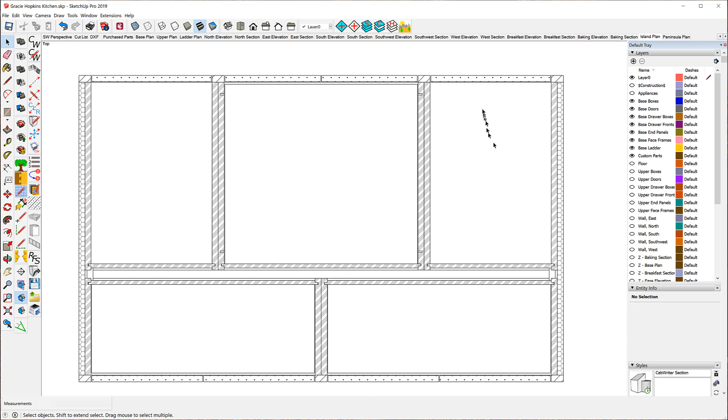I also added the island plan. This is the plan view for the island. And we added the peninsula plan view back in Part 10.

The other thing I did was I renamed this model from CabWriter Comprehensive 3 Part whatever to Gracie Hopkins Kitchen, because this is the final drawing. And since I did that, I also changed the project name to Gracie Hopkins Kitchen. The interesting thing about that is that name will be used in layout, and I'll show you later.

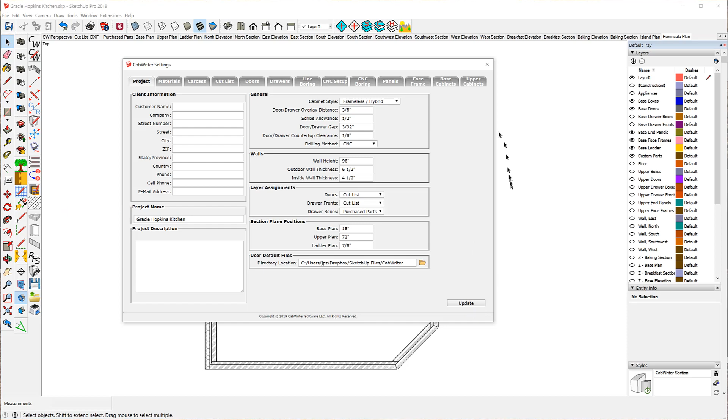So those were the changes I made. And this is the drawing. Oh, the other changes I made is notice these are now northwest perspective, northeast perspective, southeast perspective, southwest perspective. And I reordered them just a little bit. So I just renamed these, and that was that.

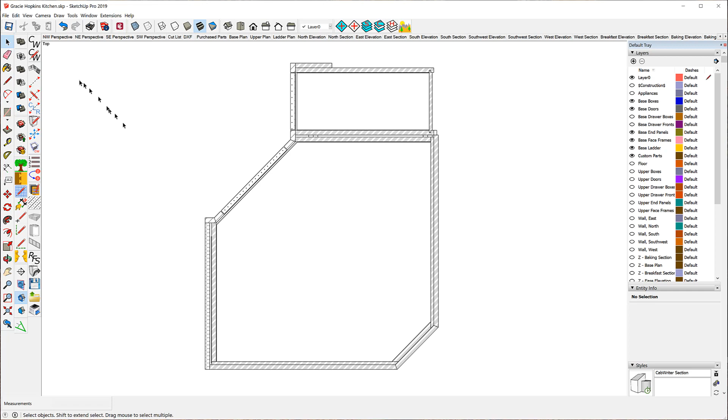Before we get started with our layout drawing, there's one other thing I wanted to mention. In part 10, recall that I had made some fixes. Most notably, I fixed the door and drawer. Let me bring it up here. The door and drawer fronts, remember, had the wrong materials, and I used the extended entity info to correct those.

So if I bring up the extended entity info, and if I look at this door right here, notice it said sheet good MDF. But watch this. If I instead select this door and say retrieve the cabinet defaults, and I look at materials, well, that's not a good example. Oh, yes, a better example is down here. Let me bring up the...

Notice the materials in here. It's got that A1 type of material. But if you look at the extended entity info for that, we corrected it to be sheet good MDF.

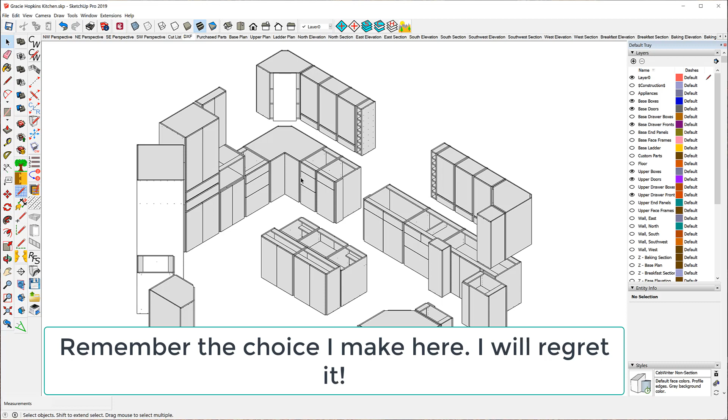And that's what we're going to do here. Instead we're going to start with creating the layout drawings. Now, creating the layout drawings is pretty easy.

If we go to the File menu and look at CabWriter to Layout, we have a bunch of things we're supposed to do. By the way, these are in the order you should do them: this first, this last, this second to last, and if you have to make any changes to an individual scene, then this second to last, and this third to last.

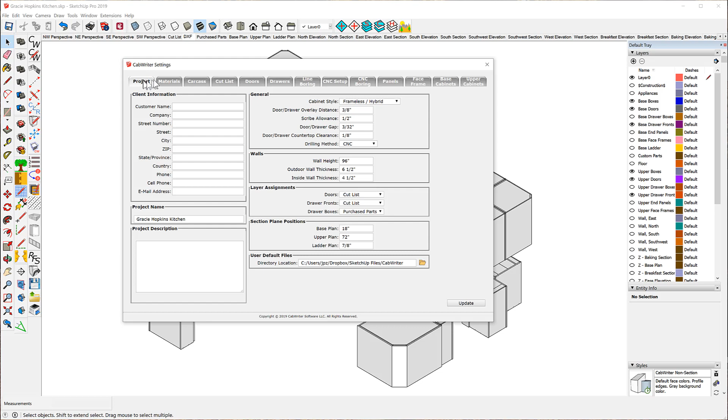But this is the order you should do them. And we've already done this one — we did that in part 10 where we assigned the hatches. Remember this? We did that in part 10. So that's done.

We also created sections from section planes. That's what all of the scenes were about.

And now what we're going to do is choose a layout document and set it up correctly for what it is we want to do.

That's this dialog box. First thing I want to do is choose a paper type. I'm going to choose Architectural D, 24 by 36 inch. I've got some other choices I can make here, but I'm going to use this one because that's a fairly good sized drawing and this is a fairly large model. The other reason is because I only have templates for this.

I'm going to create my drawings in the landscape view, so I'll choose landscape. I have two templates: one is NESAW, which is Greg Larson's New England School of Architectural Woodworking, and one is CabWriter. Well, CabWriter is a ripoff of NESAW with just the logo changed and my name in there instead of Greg's. So I'm going to use CabWriter.

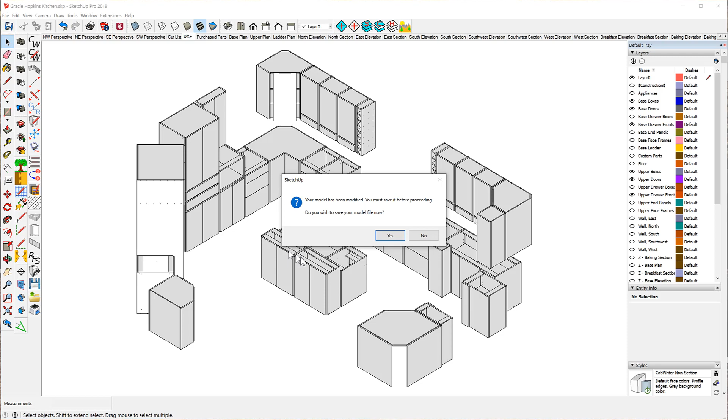It'll ask me if I want to save my model, and I'll say yes. Now I've got to be patient — it won't take too long, but we must be patient. I want to wait here just so you have a sense of how long something like this takes. It's going to send about 28 scenes, I think, to layout.

Should be just any moment now. There you go. It's going to open the layout application.

Remember in the setup where we had 4 numbers: 1 inch on the left, 1 inch on the top, 2.5 inches on the bottom, and 7 inches on the right. The reason for that is because on the right we have general notes, material legend, and our logo, and on this 24 by 36 inch sheet of paper that actually takes about 7 inches. So we're just telling CabWriter it can't use that. Similarly here, this is about 2.5 inches CabWriter can't use, and here 1 inch and here 1 inch. So that's what that was all about.

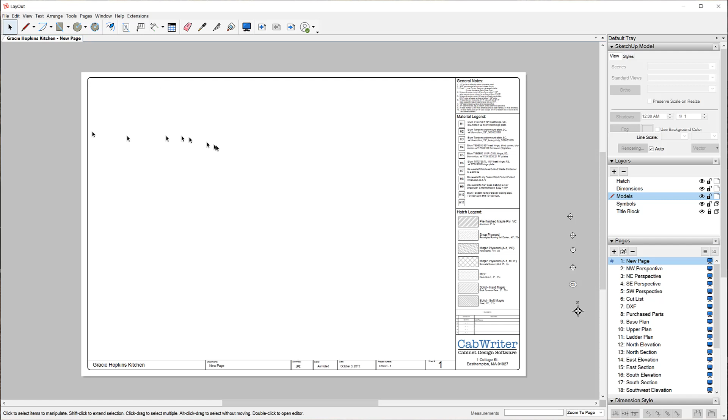In this particular model, I didn't follow this hatch legend. I used different hatches, so for instance pre-finished maple plywood may or may not have this. Maple plywood A1 VC, we don't have any of. So this legend may not be right for this model - in fact it won't be right. But when you're doing yours, make sure that whatever template or hatch legend you're using is what you use when you assign hatches in your model.

This first page is simply a new page. If you want to add a page to your drawing, you can do that by just putting something on this, renaming it, and then moving it to the position you want. But I'm going to delete it.

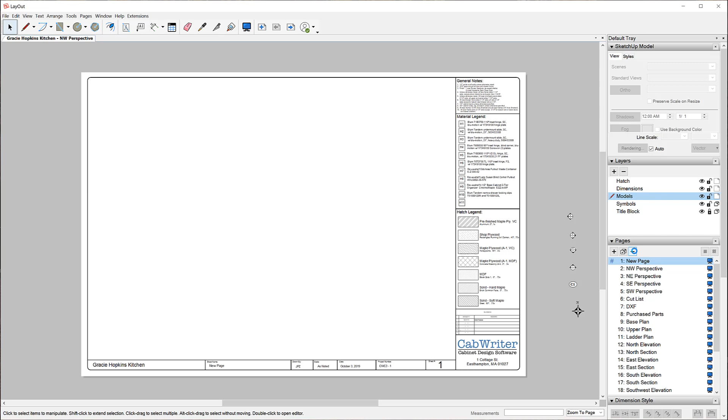This is slow. There we go. All right, so we deleted that, and now we're looking at our northwest perspective. That was the first scene, and there's 4 of them. This is the last one.

So you have 4 perspective scenes, and those will be your first 4 drawings. Now as far as shop drawings are concerned, you probably don't need the cut list scene - you probably want to get rid of that drawing. You may want it for some reason, I'm not sure what. It's used in SketchUp so that we know what gets put on the cut list.

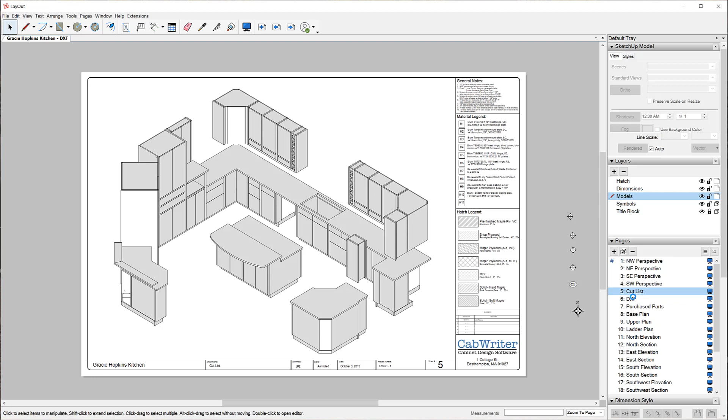But in the actual drawing set for shop drawings, probably not needed. The same with DXF, probably not needed, and certainly the purchased parts is not needed. So these 3 you might want to get rid of.

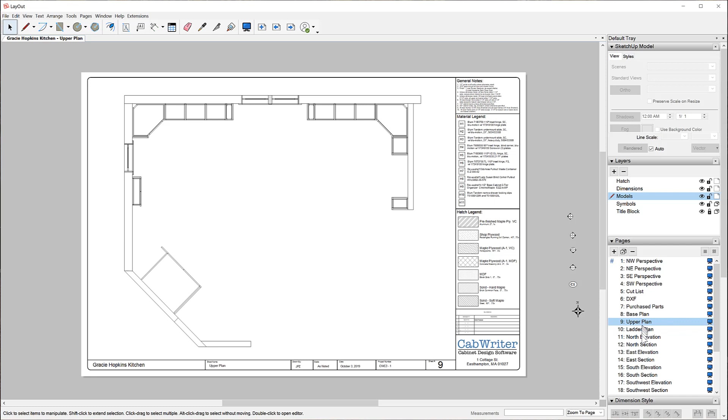The next one is the base plan. Now notice the base plan is not hatched yet - there's no hatching here. None of these plans are hatched at the moment. There's the upper plan, and this is our ladder plan, and this is the north elevation, and the north section. None of this is hatched.

But what we'll probably want to do at this point - what we must do at this point, because recovering from it later is really difficult - the scale of 1 to 10 seems to work pretty well for everything I've done up to this point. This is a scale of 1 to 10. How do I know that? Well, I can select this, look over here in the SketchUp model, and see my scale is 1 to 10.

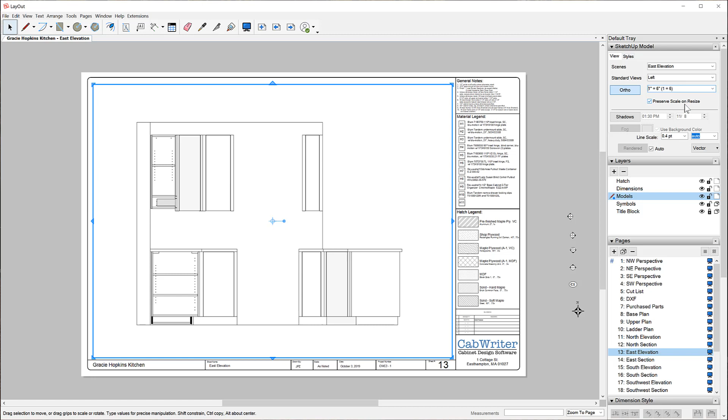My next one isn't going to be so nice. I probably want to scale that up, so the way I do that is simple: I select it, I go over here to my scale, and instead of 1 to 10, I'm going to choose 1 to 6. See what that looks like - that looks much better, so I'll just leave that alone now.

And I'm likely going to need the same scale for the east section, so I'll select that, come over here and select 1 to 6. And I have to do that for all of these - I'm not going to do this online - but I have to do that for all of these scenes, or they're called pages now. Each scene is a page in layout.

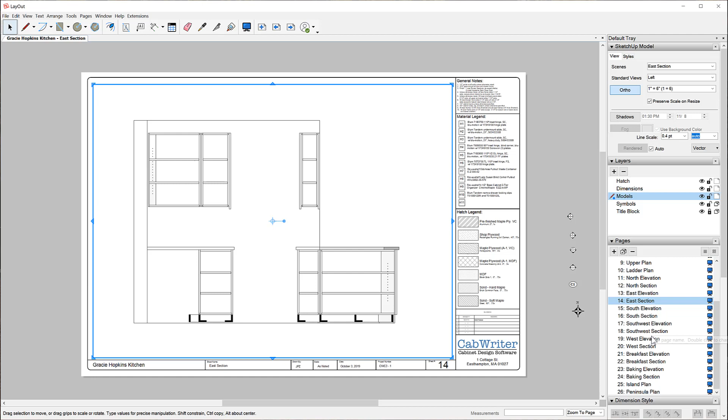But I'll get down here to the peninsula, and this one probably needs to be a little bigger yet. That probably needs a scale of 1 to 4. That's better.

By the way, you can make your own custom scales - see down here it says add custom scale. What I would do if I were you is create a 1 to 1, 1 to 2, 1 to 3, 1 to 4, all the way up to 1 to 10. That seems to work well, so that here, instead of 1 to 4, we might want it 1 to 3.

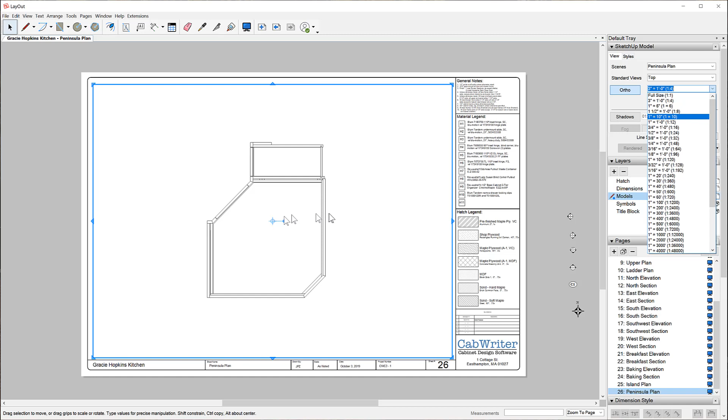That might work better. So giving yourself a lot of scales to work with is a good thing.

So offline, what I'll do is create the correct scale for each of these pages, and then close and save and close Layout, because the next step requires that Layout be closed. The next step is moving the hatches over.

Now the reason I have to set up the scales appropriately to send the hatches over is that the hatch is nothing but a group, a two-dimensional group, and it has to be scaled appropriately when we add it to the drawing. So if we have the wrong scale and want to change it later, the hatch group won't scale with it.

So get your scales right. For each of these pages, make sure you get the scale right. Then save your drawing and close it before you do the next part. Now I'm going to do all this offline, and I'll come back and show you how to move the hatches over.

Okay, I'm back, and I've fixed up all of the scales. I'll just show you a couple down here. The island plan, I made that 1 to 4. You can see that up here.

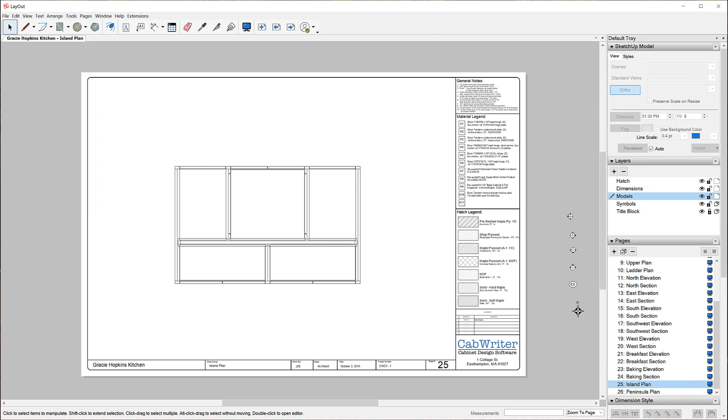And baking elevation, baking section, those are 1 to 4 as well. Now if I had a 1 to 3, that might even be better, but I don't have that right now, and I'm not going to create it.

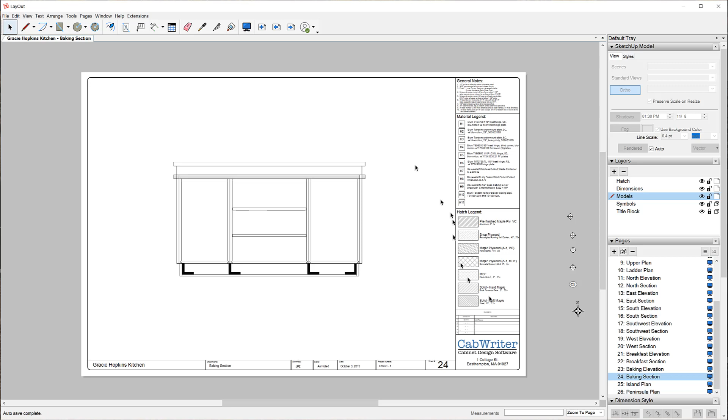So what I'm going to do now is save this. Well, let me go back to my first northwest perspective, and I'm going to save it. And I'll close it, which brings me back to here. And now I'm ready to go to File.

CabWriter to Layout. Turns out I don't have to edit any of my scenes. But if I had to edit one of these scenes, I'd probably want to go back to Send Selected Scene. In other words, I would select the scene I've just edited and use Send Selected Scene to Layout, then save it and close Layout. Come back here. And now it's very important that Layout be closed.

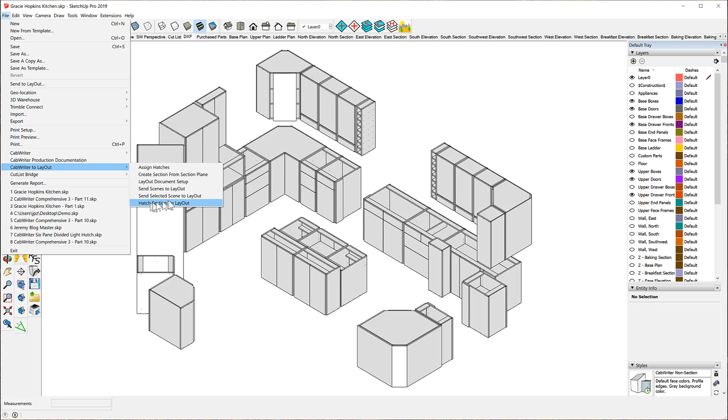Now I'm going to say Hatch Scenes to Layout. This will take a little while. We'll wait and be patient.

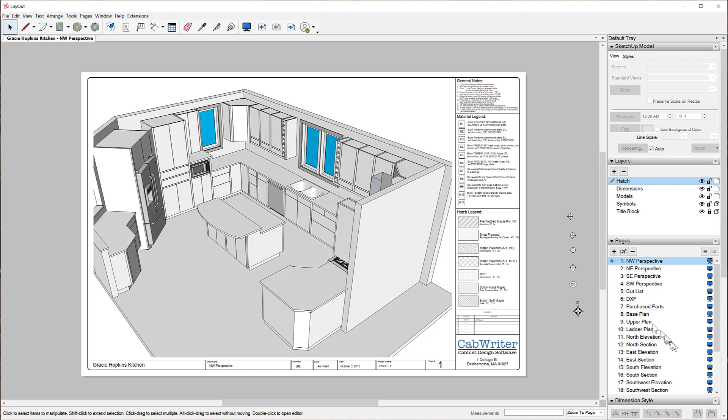And so let's go to what we expect to be hatched. Let's go to the base plan. Lo and behold, it's hatched, as is every other page. They're all hatched.

And so that's it. Now you are ready to begin dimensioning and labeling and noting in any way you want your drawings, and you will save them when you're done. I'm going to save this right now.

I'm not going to do that online. Layout is, you know, it's like SketchUp. You have to learn it. There are some resources that I'll point out in a second that are pretty good for learning Layout.

I'm not going to spend time here teaching Layout, but just to mention, you have dimensioning tools that you put dimensions down with, very much like in SketchUp. Labeling tools—you got some nice little icons over here that you can drag and drop anywhere you want. These are meant to show section cuts and tell you which cut it is and what page it's on.

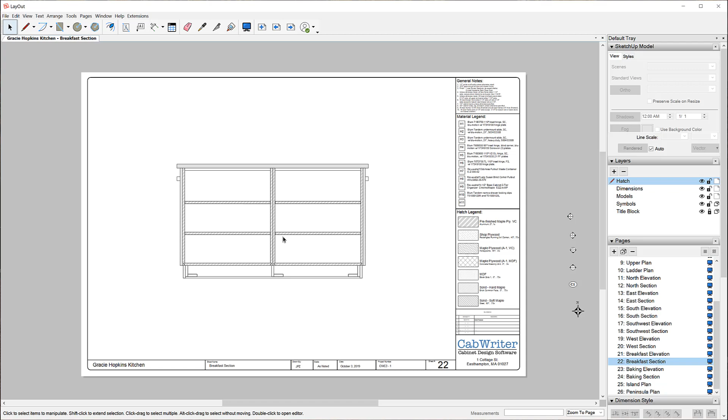In fact, let me go to the layout drawing that we started with in part 1. Okay, here we are with the layout drawing that I did back in part 1, and I actually dimensioned it so you could see some of these things.

But notice I'm zooming up here. This tells me that's cabinet 10, that's cabinet 7. This is cabinet 1. Cabinet 1 is a 3-box cabinet, and cabinet 2 is also a 3-box cabinet. I've got the dimensions on here.

This tells me this is section cut 1 for this drawing, and I can find it on page 11, which is the north elevation. It's looking at the north elevation. So if I go to page 11, I should expect to see the elevation view of the north wall. And lo and behold, if I look down here, that's what page 11 is.

This one, for instance, is my 6th cut on this page. But to see it, I can go to 21. Well, 21, I can tell, is the baking elevation. So this is the baking center right here, and so, lo and behold, that's the baking elevation.

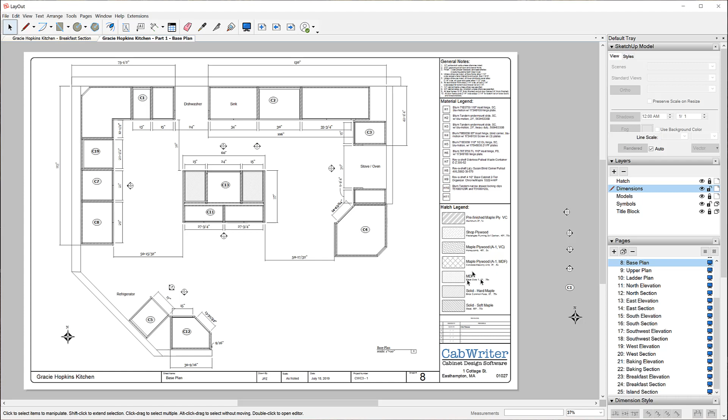And now what we're going to do is create our production documentation. Recall a while back in this video I mentioned we had a choice to make, and that is whether to produce the layout drawings first or the production documentation. I chose to produce the layout documents first and the production documentation second. And that wasn't a good choice. I made a mistake, but I'm not in bad company.

Before, I used a number of quotes from Albert Einstein to Joan Collins, and they've got a theme. The theme is essentially that if your goal is to avoid mistakes, or if you've never made mistakes, you've never really accomplished anything or tried anything new. Well, I make plenty of mistakes. Mistakes are part of the learning process. And my gift to you is that I've made mistakes that will help in your learning process.

So without further ado, let's move along and see what those mistakes are, and I'll tell you how to fix them. I'm not going to fix them in this video, that would take too much time, but I will tell you how to fix them. And hopefully you will learn a lot from that and not repeat them.

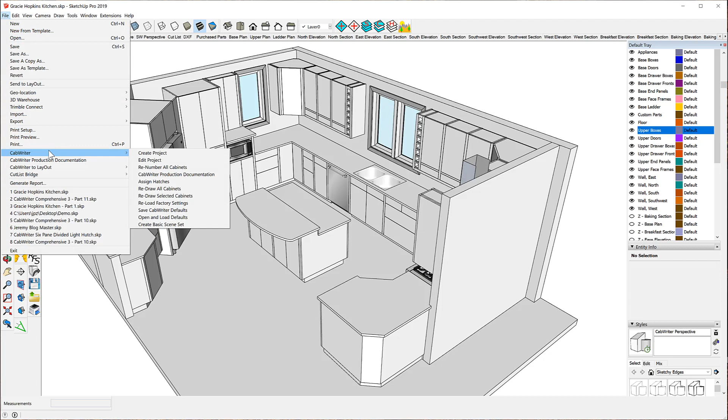Okay, so the first thing we want to do in creating the production drawings is go to the File menu and choose CabWriter Production Documentation. That will bring up a little dialog box that's going to remind you that this is a process that could take a while. And it's going to warn you that if your outliner dialog box is open, please close it before proceeding. It can double the computational time - actually double or triple or even more.

And so I'm going to check right now, make sure I don't have it open. And lo and behold, I do. So I'm going to close that outliner dialog box.

So the other dialog box that comes up after I close that little warning is the production documentation dialog box. I'm going to create files with a comma separated value delimiter. That's the most common. In some parts of the country, people use commas for decimal points, and so you may, in that case, want to use a different delimiter.

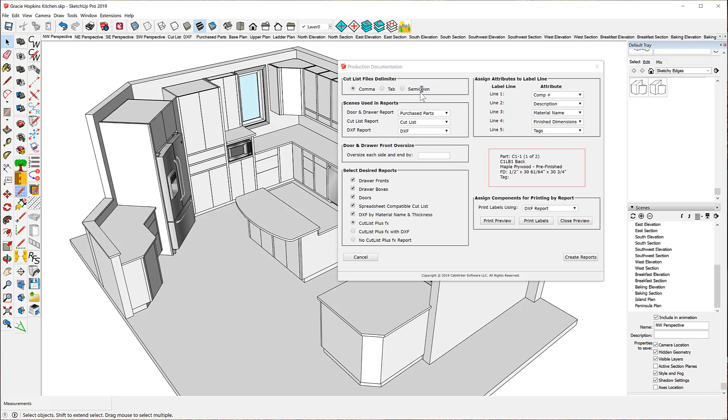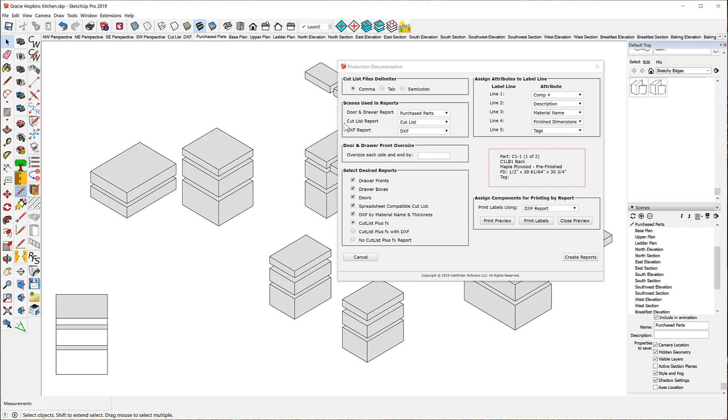All right, in the scenes used in reports - remember, my purchase part scenes are only going to include the drawer boxes. And so I'm going to put that scene I'm going to use for my door and drawer report, although it's only going to have the drawer boxes in the report. The cut list is going to have - I'm going to use the cut list scene for the cut list reports. And I can choose, by the way, any of these scenes for any of these reports, but the way we made these scenes, it makes sense for me to choose the cut list scene.

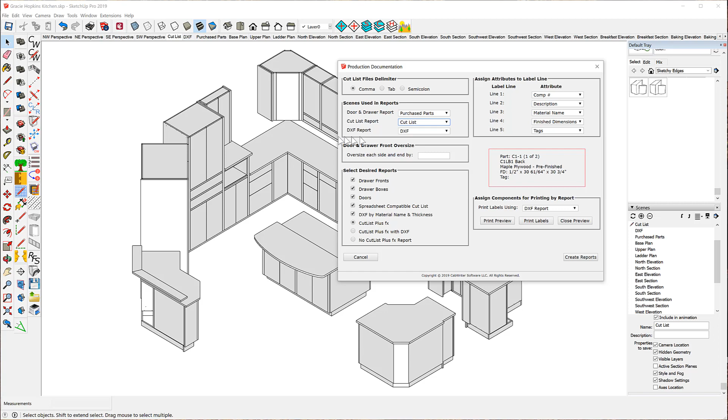For the Dxf report, I'm going to choose the Dxf scene. Now the cut list scene has almost everything in it; it doesn't have the drawer boxes because those are other items. The Dxf scene is going to include the drawer fronts, door fronts, and the base boxes, because those are all going to be cut on the CNC machine. So I include them in the Dxf scene for my Dxf report.

If I were going to make my doors and drawers, or buy them from a third party, I might want to oversize them a tad. If I buy them from a third party, I might end up shaving the edges a little bit just to make sure I'm satisfied with the construction. So you might want to make them bigger by a 32nd of an inch or something, and take them down with a hand plane. But I'm going to put nothing here for the moment.

And I'm going to choose drawer fronts in my report, drawer boxes, doors, spreadsheet compatible cut list. This spreadsheet can be either Microsoft Excel, Open Office, or whatever accepts comma separated value input.

My DXFs, I'm going to produce two of them. Actually, I won't even produce this one—yes, I will, I'll produce the capability for it, I'll explain that later. I'm going to produce DXF reports by material name and thickness, and I'll also produce DXF reports by individual component. You'll see why later.

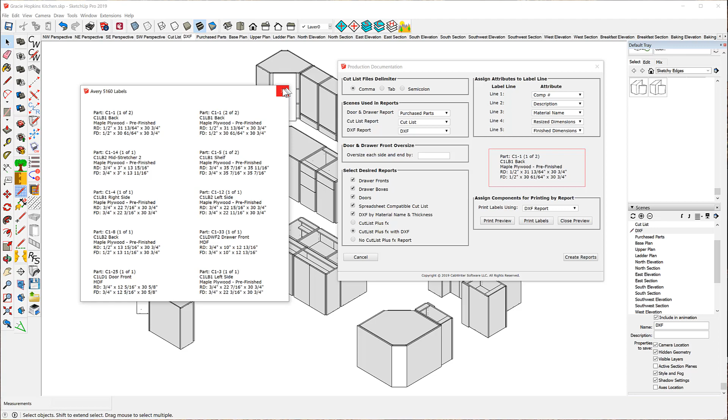All right, but that's not what we really want to deal with here. I can print the label simply by hitting print. I can close the preview with this button here. But what we're interested in right now is this side of the dialog box.

So now I'm going to create my reports. Now this is going to take a while. Notice that if I click somewhere in the white space, I'll get this little blue circle—on PCs at least—that tells me things are busy. It's going to take quite a while.

I think I'm going to let it run and waste a little time on the video, because it's important for you to understand that you might want to go away and get a cup of coffee and come back. This one I think is going to take close to a minute and a half, something like that.

So we have to be patient. My machine, I believe, is a 12-core, and if you could look at the progress bars you would see that they're in full use. My fan is going like crazy trying to keep the microprocessor cool. Again, I'm wasting this time because I want you to have a feel for how long it might take. This is a pretty big project.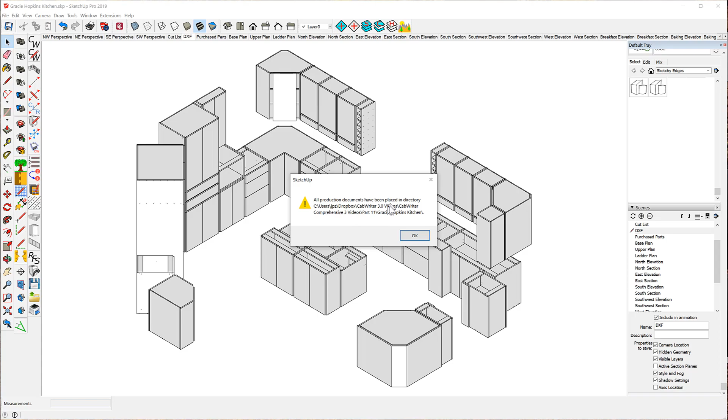It's in a folder: CabWriter 3 videos, part 11, Gracie Hopkins Kitchen. So I know where that is—I'm not going to write it down, I'll just say okay and bring that up. Here it is. They're all put in this folder because this is where the Gracie Hopkins skp file is, right there, in that part 11 folder, which is the part we're in right now. This is a backup for this Gracie Hopkins Kitchen, this is the layout file we've created, and here's all of the production documentation.

This is a .cwx file. If you double click on this, it'll open up a third-party application called CutList Plus fx. We're going to do that. It's a very nice application. It doesn't come with SketchUp or CabWriter, it's a third-party application, but it's a very handy application. We're going to look at this a lot.

You can get the same information as this CWX file in a spreadsheet, and that's this file. This is a CSV spreadsheet file, so you can open it up in Microsoft Excel, Mac Numbers, OpenOffice, or whatever.

This is another CSV file, which is the door and drawer report.

In here is all my DXF files. Now I've got DXF files in three distinct formats. One is individual parts. If I look at that, the individual parts are broken out by material type and thickness. So if I look at my 3/4 inch maple plywood pre-finished, every single part that's going to be put on 3/4 inch pre-finished plywood is here. There's an individual DXF file for each part. The reason for that is there's a number of CNC machines or third-party vendors who might cut your plywood for you that want things in this format, DXFs for individual parts. So we produce that for those people who might want it.

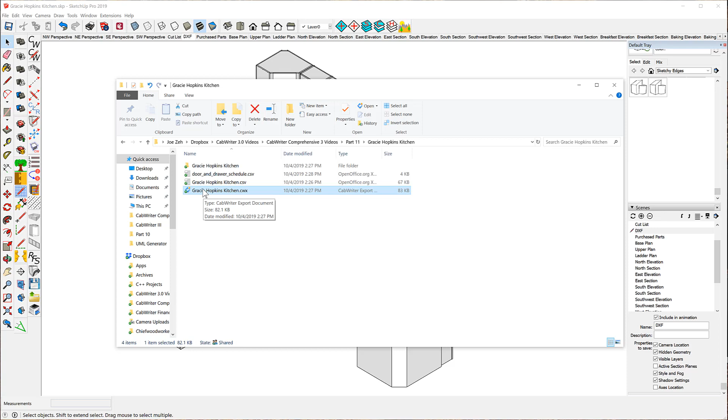Here you can see the part number for each part. So for instance, if I were to sort this by part number, which I can do by just clicking on this heading and go to the top, it starts out with Cabinet 1. Every different component in Cabinet 1 has its own individual number. C11. Now, the way it sorts these is it starts out with C11, C110, 11, 12, all the way up to C2, C20, 21, all the way up to C31, 32, 33. It doesn't do a great job of sorting, but you get the idea.

This is the subassembly. So if I sort by subassembly and go to the top, I have some parts that don't have a subassembly, which is interesting. That's a problem, and we might want to investigate why that is. I'm not sure why right at the moment, but we'll figure it out. And so this sorts the subassembly.

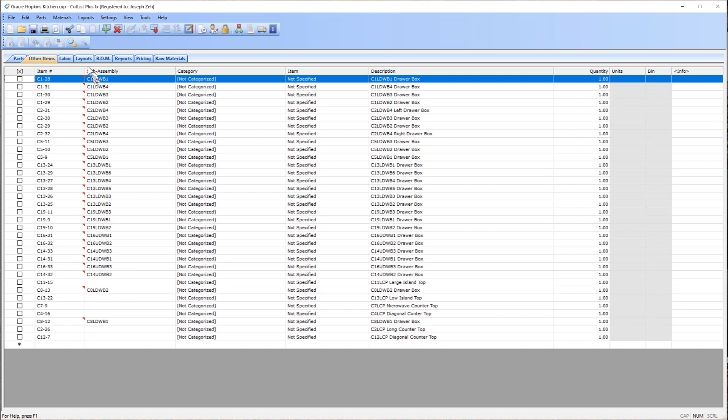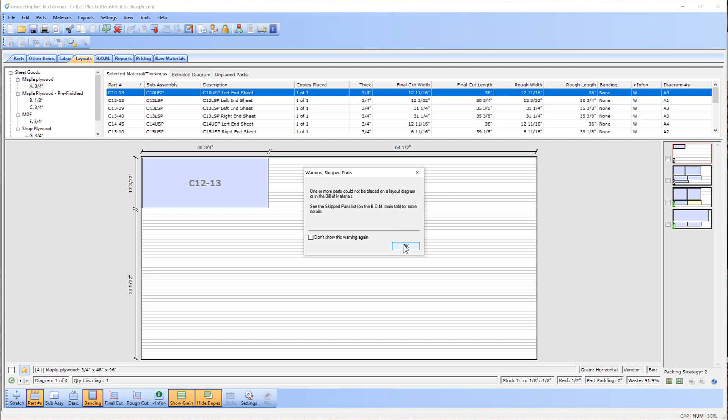And it's optimizing the layouts. Notice I got a warning sign. It says one or more parts could not be placed on a layout diagram in the bill of materials, and it says see skipped list. Well, it's easier than that. I can say OK and go back to my parts list.

I'll notice that some of them have this orange line, highlighted with an orange line, and those are problem parts. So I'm going to look at them one at a time.

All right, so I can look at this and right off the bat notice something strange there. It says the thickness is 21/32, and it's calling for sheet good shop plywood. Well, I don't have 21/32 shop plywood, so that's what it's complaining about. There's no material to make this from.

But it's actually indicating a problem in the drawing, and let's go to the drawing and see what the problem is. I'm going to clear all layers and just bring up my ladder base.

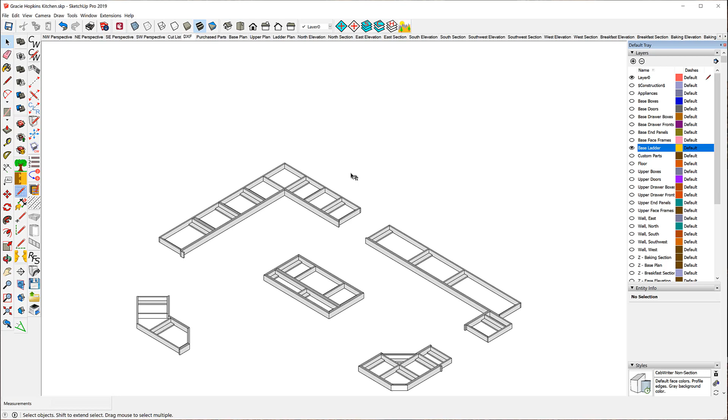And I'm going to look with this tool right here, which you can download from our website. It's part of the Construction Plus tool. But with this little tool, I can pick any part and it'll tell me its dimensions. So I'm going to pick this part right here.

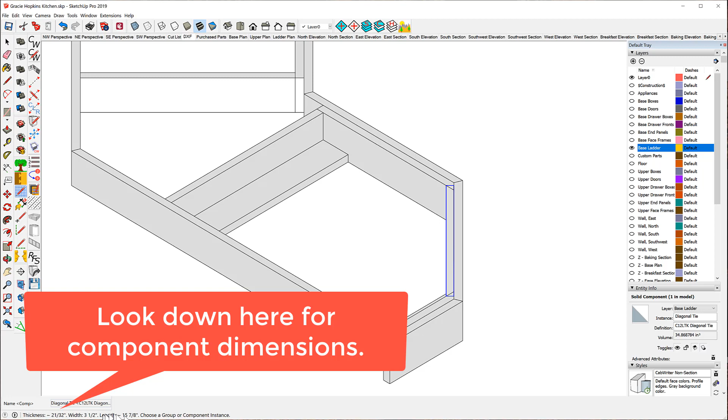And I'm going to look at its dimensions. Its thickness is approximately 21/32. Its width is 3.5, and its length is approximately 15 7/8. The length, I can understand being an approximate measurement because it's a result of a hypotenuse of a triangle, so that's not surprising. But this piece of material should be 3/4 of an inch thick, and it's not - it's approximately 21/32.

So that was a drawing or modeling mistake on my part. Remember, this is the cabinet that we started off as one type of cabinet, and then we modified it for this angle here, and I created these parts manually. And when I did, I made a mistake. Instead of making this piece of wood 3/4 of an inch thick, I apparently made it 21/32. So that's the first problem.

The way I would fix it, I'd go back to my model, make this the correct thickness, and having done that, I will have to fix up a number of things. For instance, the hatch for this part will now be different, so I'd have to recreate any place where it shows up in the hatch, and those scenes, which means I'd also have to correct them in layout. Not a big deal, but it takes time. So that's problem number 1.

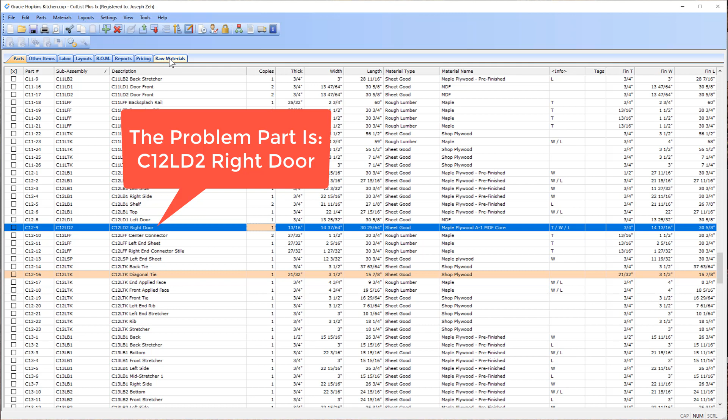Let's go back and see problem number 2. All right, now this one - it says maple plywood A1 MDF core. Well, first of all, I don't have any of that raw material in my raw materials list. So let me go to maple plywood, and it's 13/16. So I have no such thing in my material sheet goods.

Notice maple plywood A1 MDF core - I don't have anything, so it can't produce the layout for that. But the bigger problem is this shouldn't be maple plywood A1 MDF core.

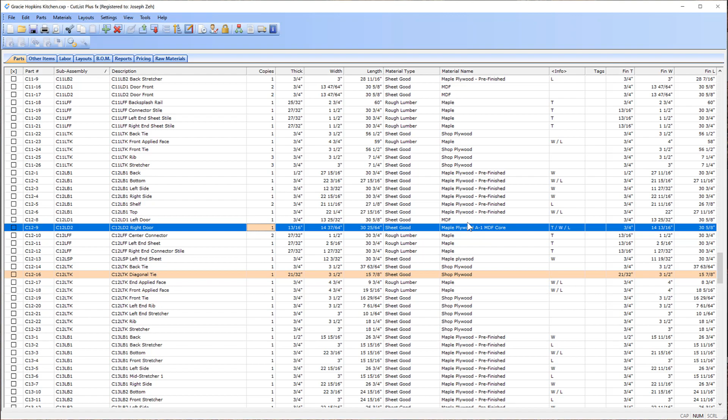Remember I corrected all the door and drawer fronts to get rid of A1? Well, what happened was this cabinet, when I modified it over here, it originally started out with 2 doors much like this. If I look at those doors and I look down here, notice C8LD1, C8LD1, because they're both the same size and exactly the same component, just 2 instances of that.

This started out with both of these being the same size and both being the same component, but when I resized it for this angle here, I had originally forgot to do something. I had originally called this C12LD1, and I had originally called this C12LD1 right door. Now the component names are definitely different - this is the left door, and this is the right door.

But CabWriter requires that you don't have 2 doors with both D1 at the end of their prefix if they're different components. If they're different components, they have to have different D numbers. So I had to change this from D1 to D2.

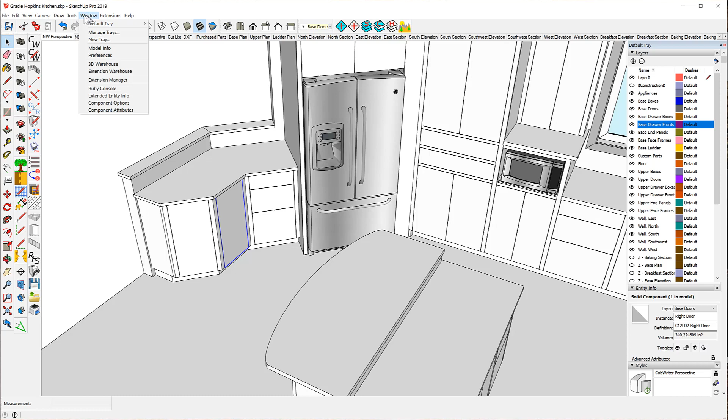So what I want is if I bring up the extended entity info, I want this to be sheet good MDF. This should be sheet good MDF, so I should change it to sheet good MDF. In which case, it would have been fine in my cut list. But this is something I should have done before I produced the cut list. So that was mistake number 2.

Mistake number 3. Notice these two parts. Look at the length: 117 inches. We don't have plywood large enough for that.

If we were using 5 by 10 sheets of plywood, this would work. But if I look up sheet good shop plywood, it's 48 inches by 96 inches. So it can't place those parts.

Let's look at what they are. Let me take that tool here again, get component dimensions, and look at this. Notice the length is 117 inches. And that's true of this one here too - the length is 117 inches.

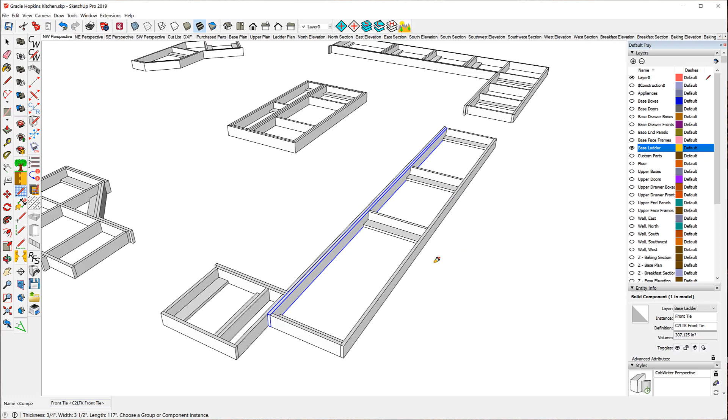I might have to create some new parts, and I might have to do it using the Make CabWriter component tool, but I'd fix up the model. Once I've changed that, I've got a number of things I have to change, like the ladder-based view itself. That has to be fixed up, and the hatches will change, as will these views in the layout drawing.

So again, I've got some patching up to do. Not a big deal, but it's work. It's just another one of these things we want to be careful of, that we haven't created any parts that are too long for our plywood. So let's go back and see what else we have.

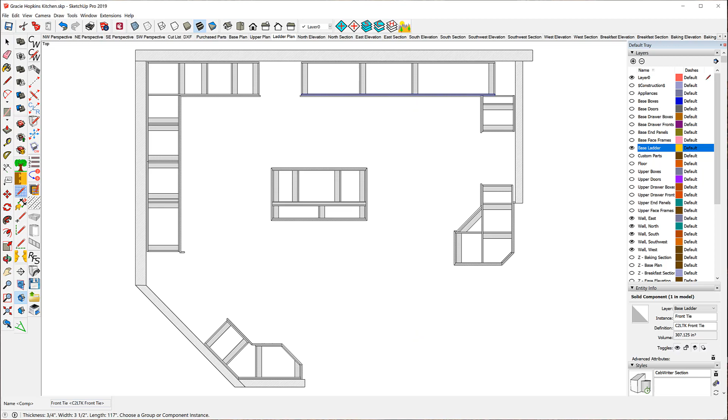This is an interesting one. You look at this and say, gee, what's the problem here? That's a back, 1/2 inch plywood, 49 by 30, sheet good, maple plywood pre-finished. Looks like there's nothing really wrong here.

Except notice what it did. Look at the length. The length is less than the width. Why is that? Well, CabWriter corrected for grain direction.

Apparently the grain wants to run in this direction, the 30-inch direction. It's a back, so the grain direction of a back of a cabinet wants to be along the blue axis. Well, apparently this cabinet is wider than it is tall, and so the grain direction wants to be the 30-inch direction. The cross grain direction wants to be the 49-inch direction.

But we only have 48-inch plywood in the 49-inch in this direction, in the non-grain direction, the cross grain direction. So it can't place that part. Let's look at it.

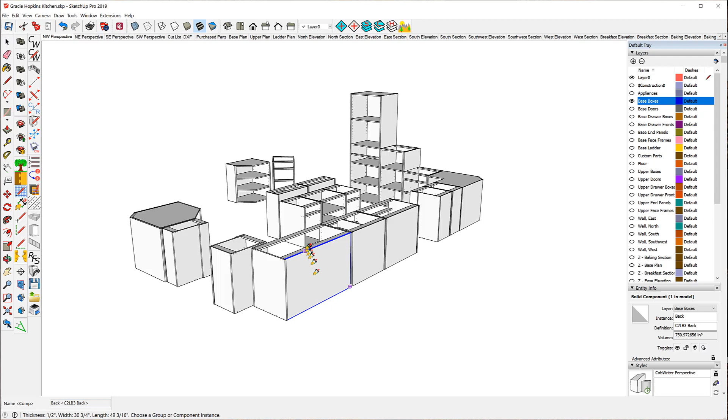So the way I can fix this, there's a couple. I can either make this cabinet smaller by moving this stile over and making my sink bigger - I think that's the sink. But probably the easiest way to do it is I've got to get it under 48 inches, which means I've got to remove at least 1 inch and 3/16.

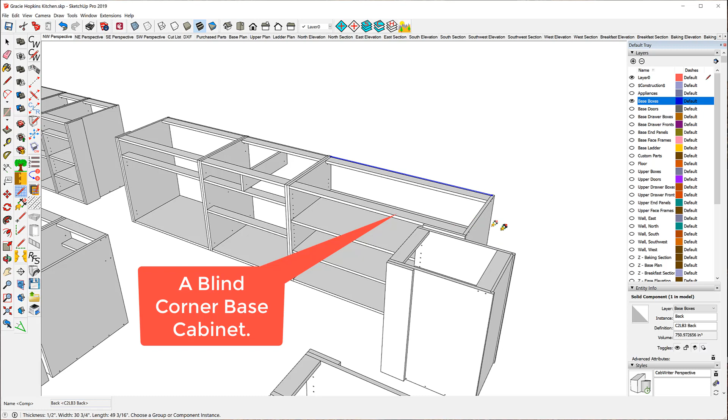What I would do, notice this cabinet is a corner cabinet that goes into the end here. I would make this 2 inches shorter and have it just come to here. It's not going to lose much of the cabinet, and it'll solve this problem.

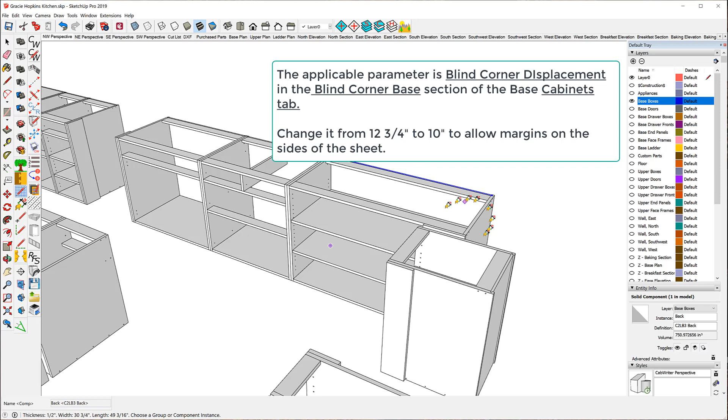So I would just redraw this cabinet, and I would change the parameter about how far back into this corner this goes. So that would fix that last problem. Now again, I would have to change the number of drawings.

What does this tell us? The conclusion I draw from this is don't start doing your layout drawings until you've produced your component, your production documentation.

Do your production documentation first. Find these problems, make changes in the model, and then you wouldn't have to fix up all of the problems that you might find in the cut list.

In fact, what you might do is even before you create scenes in the model, you might run production reports and just see if there are any problems and fix them at that point, because it's much easier to fix them when all you've got is no scenes and just the model.

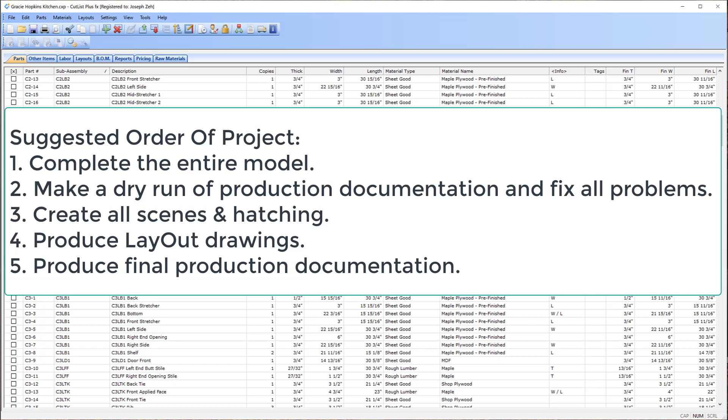And any problems you might have, you can fix, then do your scenes, then do your production reports again, and then do your layout drawings. That's the order that this set of mistakes indicates we ought to take. So it's a learning process. I've learned.

So let's move along. I'm going to ignore these mistakes and look at the layouts. Let me go to my maple plywood pre-finished 3/4 inch. That's how I would do that here. I'd select maple plywood pre-finished 3/4 inch, and over here is a little drawing of all of the sheets of plywood I need.

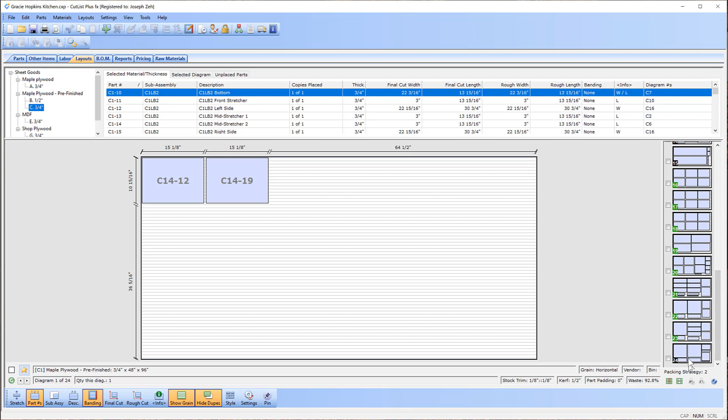Looks like 24 of them, and you can see how they're optimized. You can look at any one of them. Let me look at this one. And you can see there's not much waste.

The other thing is this CutList Plus fx allows you to optimize based on how you want to make your initial cuts. In this case, it's optimized for vertical cuts - in other words, cutting here, then here. You can see that better in some of these others. Notice, cut here, then cut here, then cut here, then cut here. This is optimized like for a panel saw.

You can also optimize them in the other direction so that you'll get a rip cut here, a rip cut here, a rip cut here. So you can choose which way you want it to optimize. But it does a pretty good job of optimizing the sheets of plywood so you don't get much waste.

Okay, but this cost - I think this version of it costs $250 or $260. And there's another version that costs about $500. You don't need the $500 version, but this one is a really nice version.

Okay, so let's get rid of that. And I want to go back and look at this. This is the same cut list, but it's a cut list produced that's a comma separated value that you can look at in almost anything, including OpenOffice, which is what this is. OpenOffice is free, and it's just a spreadsheet.

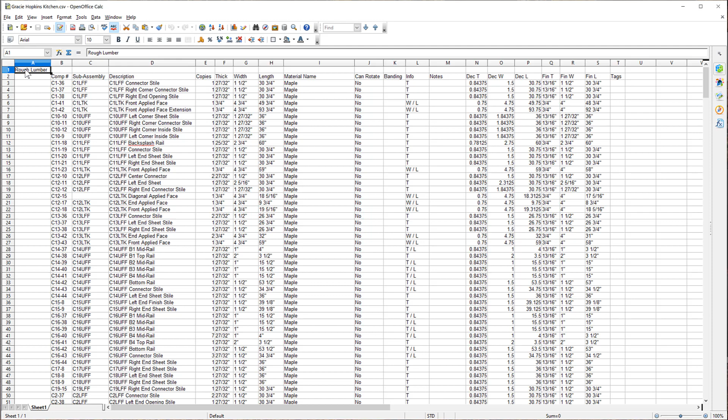And in the spreadsheet, you can sort by columns. It's a little harder with the spreadsheet, but you can sort by columns like you can in the other application. This groups all of the rough lumber here - this is all rough lumber. Then the sheet goods - this is all sheet goods. And then the other parts, so you have your draw boxes here and also the countertops.

Now, notice there's a couple of columns we want to look at here in the sheet goods. Notice this column here. And sometimes you'll see a W, sometimes a WL, sometimes a T. Oh no, not on sheet goods you won't see a T probably - on hardwood you will.

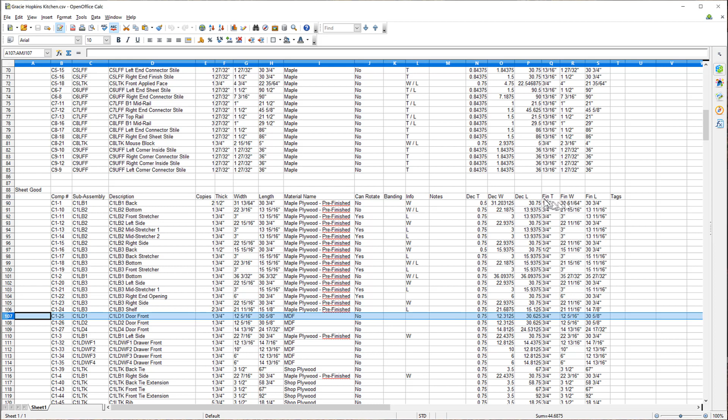But what they're telling you is that this has been resized. Those that are blank have not been resized, so you can count on their initial cuts - initial thickness, initial width, initial length will be the same as the finished thickness, finished width, and finished length. And here you can see that: 30 5/8, 30 5/8, 12 5/16, 12 5/16, 3/4, and 3/4 right there.

But on some of them, for instance like this, it says both the width and length have been resized. Well, let's look at that. The width, in this case, starts out at 22 3/16, and in the end it's 21 15/16. The length starts out at 13 15/16, and it ends up 13 11/16. So that's what that column's trying to tell you.

These three columns here - decimal thickness, decimal width, decimal length - is exactly what you would think they are. They're the finished thicknesses and width and lengths. And that's so you can create equations in your spreadsheet that might calculate things like board feet, total numbers of sheets, things like that.

Okay, let's close this. And let's go to our door and drawer report. So this gives us a report of all the slab doors. This is the door - it tells you which door it is. The material is MDF, the width, height, and thickness, and the quantity of each you need.

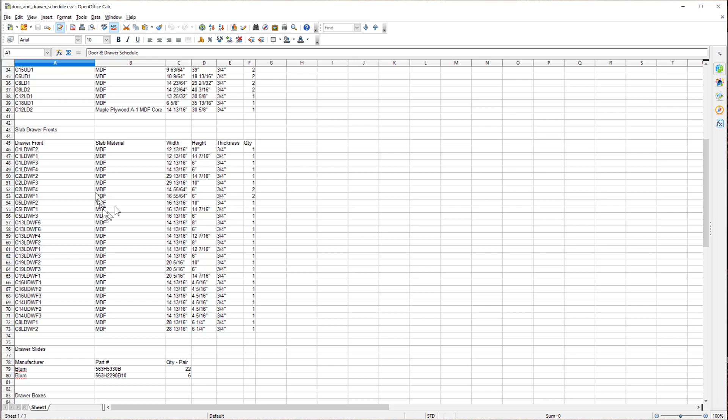This is the draw fronts - same sort of information. It also tells you how many sliders you need based on the depth of the cabinets.

Notice here, we need 22 pairs of Blum sliders with this part number, because almost all the draws are base draws. We only have - let's see - oh yes, no, we have 6. We have 6 draws up top in the upper cabinets. The upper cabinets are very shallow, so we need a different slider that's much shorter, and we need 6 pairs.

So it tells us the Blum sliders we need based on the cabinet depth. And then it tells us the boxes we need: the overall height, the overall depth, and the overall quantity and width. And it gives them names, box 1, box 2, so on and so forth.

Now some of the boxes will need more quantities. For instance, this is 6 boxes that we need here. Those are those small boxes. They have the shallow depth that are in the 2 wine cabinets, the upper wine cabinets. There's 3 in each cabinet.

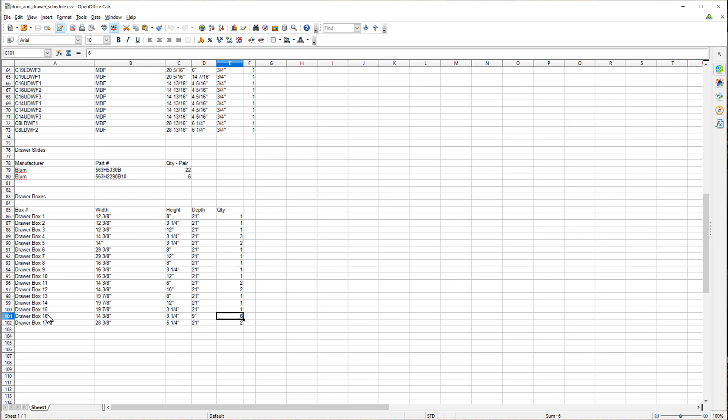As I showed you in the cut list plus FX diagram, you can relate the draw box number to the actual draws. The last thing I want to show you...

I'm going to open up an application, also a third-party application, that you might want to use if you're going to cut material on CNC machines. And the one we like is Cut2D Pro by Vectric, V-E-C-T-R-I-C. So I'm going to demonstrate again just the 3/4 inch maple plywood pre-finished material.

I'm going to create a new file. It's going to have plywood that is 96 inches wide. Now, wide in this dimension means along the x-axis, and 48 inches high, in this case meaning along the y-axis. And it's 3/4 inch thick. So I say OK. And now I want to import vectors.

Well, vectors meaning Dxf files. So I'm going to go to my Part 11 Gracie Hopkins Kitchen, Gracie Hopkins Kitchen Integrated Dxf Files, and I'm going to look at the 3/4 inch maple plywood pre-finished. So I'll open it.

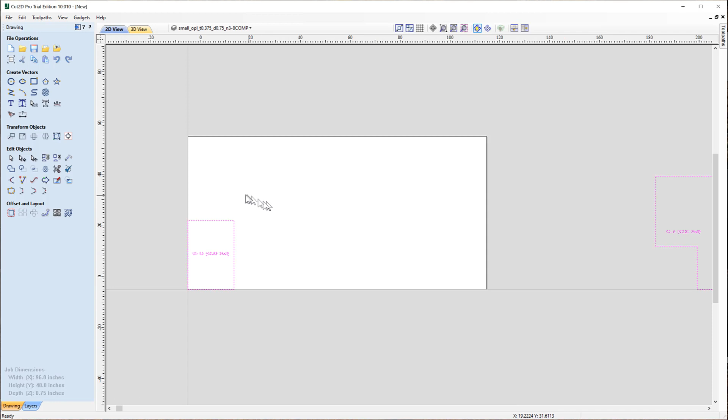Take a second. Okay, so when I first open it, all the parts are laid out in a line, and they're 100 inches apart to allow for a 96 inch sheet of plywood and 4 inches of spacing. They're just laid out in a line. I can look at any one of them, and you can see it tells me the part and gives you the shape.

Whole bunch of them. Now I'm going to tell it to nest those parts, and it's going to take a little while. I think there's 300 and some parts. So we'll be patient, as we always are. Plenty of opportunities for a cup of coffee.

And I'll preview them. This too would take a while. It's creating the drawings. It's a 2-pass operation. We need faster machines, they never seem to be fast enough. That's one pass, the second pass is much faster. And there we are.

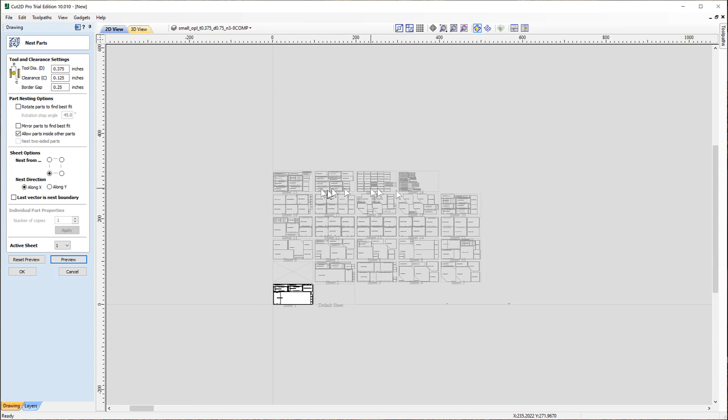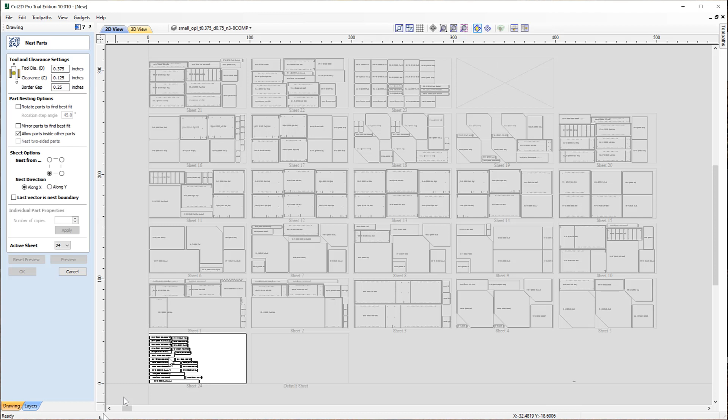Now notice it requires 24 sheets of plywood, much like the other one told us it required 24 sheets of plywood. And I can look at each of these sheets. In other words, if I choose this one, for instance, notice down here it's in white. I can blow it up.

Let's choose something like, I don't know, this one right here. Let's blow it up. Okay, you can see all the shelf holes. And what these are, by the way, these are tenons. And why you have this double line is because it has to actually cut and clean up the tenon back here. So we need a line for the bit to follow.

Similarly here, these are going to be pockets, and the bit will go inside the pocket and follow the line around. But this is the optimized layout. You notice it makes pretty good use of space. If you have this kind of a bottom, it can stick something else in here, and it does a really nice job. So you can go from here, and it'll produce another set of DXFs which has all of this optimization that can then go to your third-party CAM application to create all the G code for your CNC machine. So I just wanted to show you that.

Now, there's another problem that I want to point out, and let's see if I can find it. This might be it. Yes, this is it.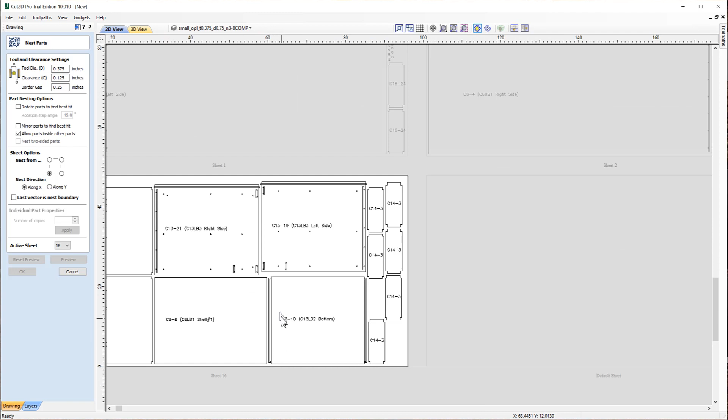Okay, in the wine cabinets, there are a bunch of shelves. They're narrow and deep, only like 3 or 4 inches wide, and they're like 12 inches deep. These are actually tongues. But unlike this one, which is the bottom of a cabinet, and here's a tongue, you don't see that here. And why is that? Well, it's because we made a mistake. Another mistake. Let me show you what this one is.

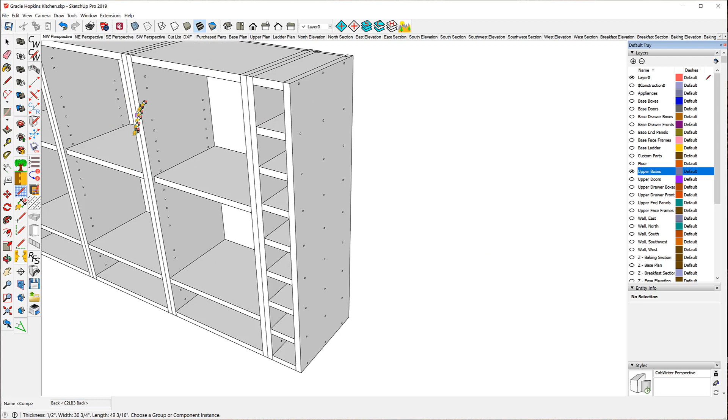And I'm going to turn on X-ray.

Okay, now look at the bottom of this. Notice the bottom also has a tongue and groove. The tongue actually starts on the top side of the bottom, and it doesn't go all the way to the bottom.

So if I wanted to cut this on a CNC machine, I'd probably want to look at the outside face, and that would tell me that I have to cut some of this tongue out, half the material for the tongue.

If I want to cut the tops on the CNC machine, notice the tongue is now on the bottom, unlike the bottom, which was on the top. So I'd want to look at the outside edge face again to make sure I cut this out.

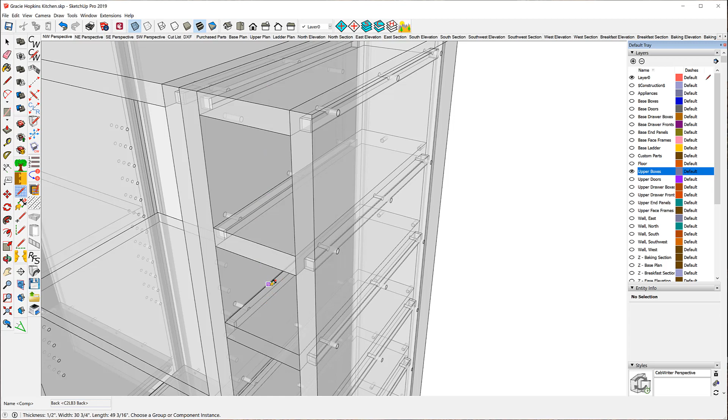Let's look at the shelves. In the shelves, the tongue is on the bottom. So if I wanted to cut this out, I'd want to look at the top side of this shelf.

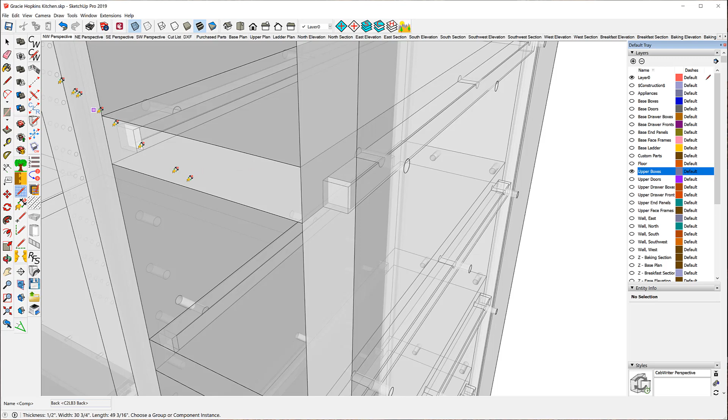Well, how do I know to tell the DXF how to create DXF files that do that? I look at CNC setup. Here is the CNC milled faces. So if I look at the sides, it says always look at the inside of the sides, in other words, the inside of a box, to figure out what to do with that side.

And that will pick up not only the construction holes, which go all the way through, but it'll also pick up the shelf holes that only go halfway through. If I told it to look at the outside of the side, it would only pick up the construction holes, and it would miss the shelf holes.

So for the tops and stretchers, it says look at the outside, and sure enough, that's what we wanted. This top, we wanted to look at the outside face, and that would pick up the fact that it has to remove material for this tongue.

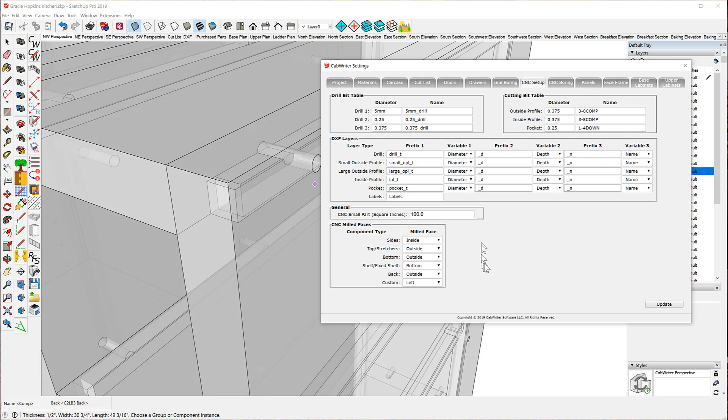The bottom, it says look at the outside face. Now the bottom's just the opposite of the top, but the way we pick it up is, again, we look at the outside face, and by doing that, we pick up the fact that we have to remove that material.

And let me go to the back. We say look at the outside face for the back. Well, if we look at the outside face for the back, sure enough, we'll pick up the fact that we have to remove the material for this tongue.

And for custom parts, you have to choose how you want to look at them: left, right, front, back, top, bottom. Default is left. Now remember, these are CabWriter settings, and every single cabinet can have its own set of settings.

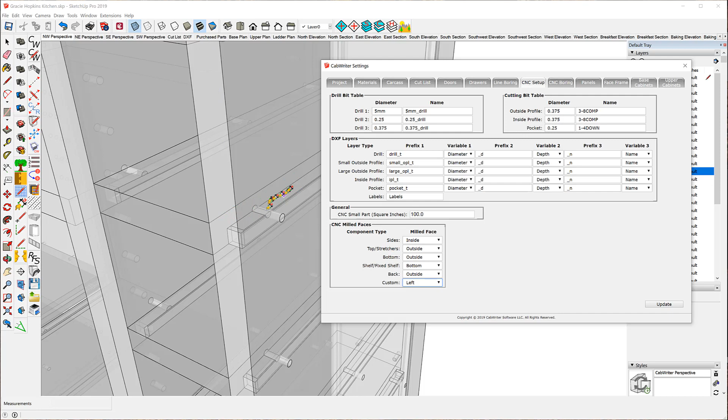So what I should have done for this cabinet is set, for fixed shelves, this to top, so that it would look at the top to see that it had to remove material for this tongue. But I didn't - I left it on bottom. Bottom's the incorrect position for that fixed shelf.

So because I'm looking at the wrong face, the only thing it's going to see here, when it looks at the bottom, is just the outline of the board. And sure enough, that's what we see here - just the outline of the board, not the fact that it's a tongue and we'd have to cut that material out for the tongue.

So that's another problem you have to be careful of, and I can only warn you to check your DXF files very closely. Otherwise, what you're going to end up doing is, in the shop, you're going to have to put these on a table saw and cut those - cut a rabbet there to remove that material.

It's not a big deal - you can cut them pretty quickly on a table saw, but since you're paying for CNC machines, you'd like to have done this correctly from the start and make sure you didn't have this problem. Okay, now that's all the problems we created, and that's how we would fix them. Now we're ready to go to the CNC machine and cut all of this out.

So let's go back. Let's wind this up.

This concludes, actually, the CabWriter Comprehensive 3 series of videos. I hope you've learned something. I hope this gives you a really good feel of how to use CabWriter to model cabinets, produce your production documentation, and cut them on CNC machines if that's what you intend to do. So until the next video, have a good day.